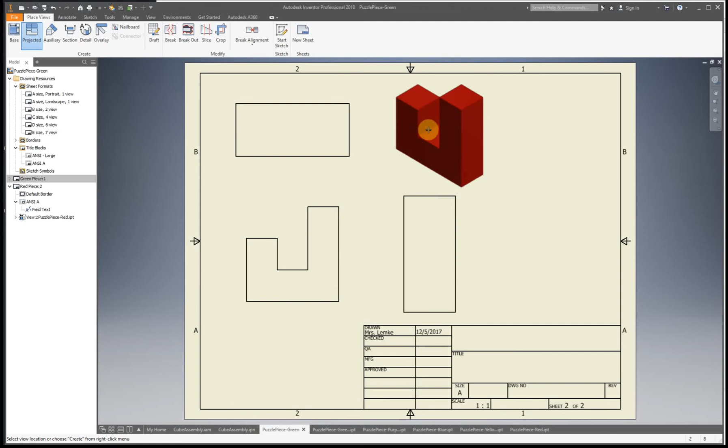So I'm going to open up our sheet 2, and you can see we have large. We don't want large. We want to delete that. And then we want to bring in ANSI A, so we have more room for our page. So this happens to be a great front view, which is nice. What I can do next is go to Place Views, Projected, and place in my other views. Then right click, Create. Remember, you're going to have those boxes until you do right click and create. Alright, so I'm going to double click on this, shade, OK, and here are my views.

So for this one, having this flipped to this side might look a little bit better, but I always refer to this piece as the J puzzle piece, so I'm going to leave it shaped as a J, because that is what I would consider the front view for this piece. So I'm going to go to Annotate, Dimension, and add in the dimensions for this part.

So you just saw that I clicked on that green dot. You can see how it's not actually doing anything. So if I move off to the side, you can see how it's dimensioning in the middle. We don't actually want that. So what I'm going to do is delete that and then put it back in. So I want the full line, not just that little tiny portion. And I'm going to click from this corner to this line.

I can place this. So I know in the green video I said you don't want the lines going over anything, but realize that they can go through as long as they're not overlapping with one of your lines. So they can cross it like this, but they can't go along it.

So if I was to do, let's just say one from here to here, and ooh, nice. So this one actually does pick up on this. The old version did not pick up on that. So that's good to know. So if you have used this before, if you made a mistake in the previous version, it's starting to correct it for you. So that will be very helpful for you guys when you're learning this.

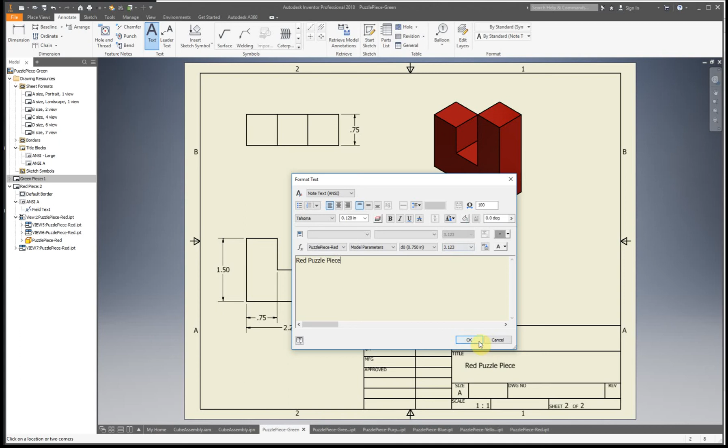So I have all my height dimensions, all my width dimensions, and my depth dimensions. That's all set up. All right, so we can add in the title. And then realize here you'd put your name and class. All right, so the next one is going to be our yellow piece. So grab yellow.

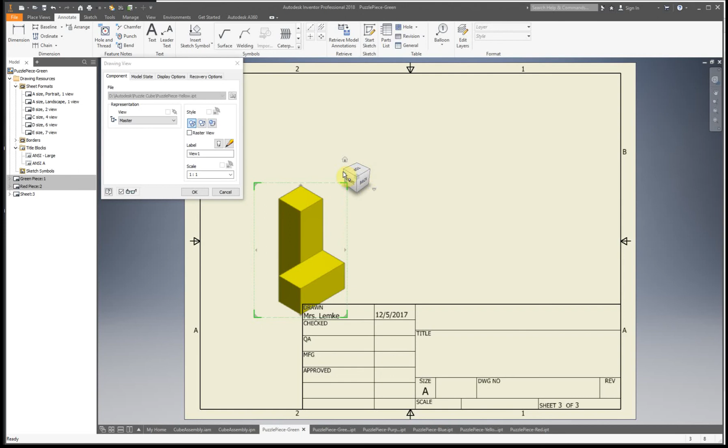So when you're doing this and you're adding the sheet and you select your new paper size and everything, it's going to bring in whatever was the front view according to the little cube in your actual part file. So for this one, I don't remember what's the best front view for this. I might have actually made this one with the good front view. So actually this one might be better. Yep, so I just happened to make this one with a good front view.

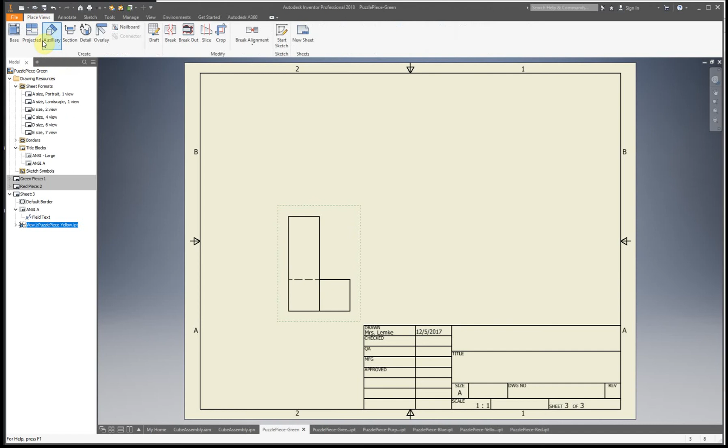All right, so I'm going to now change our title block size to make sure that I don't forget that. Sometimes you might forget it, so the easy quick check to make sure you have the right one without even having to look over where it's on this piece. This used to be called the browser, now it's just called model. If you had it closer to 2, then you know it's in the wrong spot. If it's in the middle of 2 and the arrow, then you know it's ANSI A. So quick check, that's how I quickly look at that to make sure you have it in the right spot. So again, place views, projected, place in our other ones, and create.

So you can see how these two kind of have pretty good views where they look very, very similar. And this one technically has less hidden lines, so therefore this one does kind of give you a better front view. This one does have a hidden line, but this is a really good isometric. So actually, I'm going to just turn this. Click OK. You can see how all of these automatically turn. So I'm going to now just do projected.

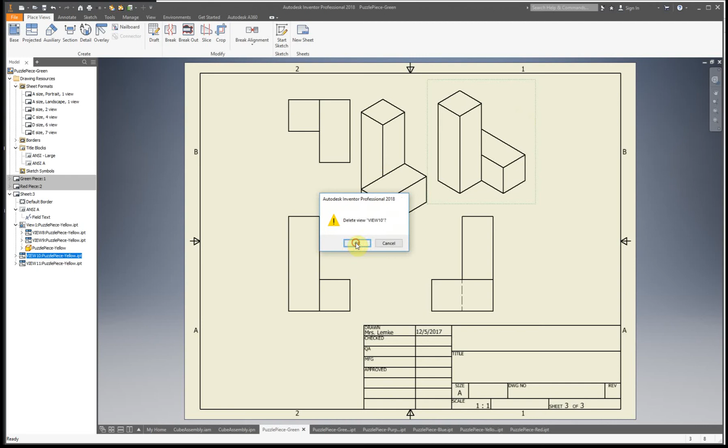So you can kind of see the two isometrics side by side. So this one's for how it's arranged right now. This is how it is by itself. So in reality, which one's better? Actually, let's go with this one, just because there are no hidden lines. So it's kind of following more of the rules that we want to do for this project. So I'm going to delete the view for how I had it previously, and this is our new isometric view for this. Okay, so what we're going to do is shade it, and it's all nice and shaded. So we're going to add in our dimensions.

So for this one, we have our total height and our height for our next little portion. And I'm going to do this small portion for the width and our total width. And then again, do the next one for depth and then this small portion for depth. So remember, we don't have to dimension this other part because we have the total and then the smaller portion of it. So remember, in yours, you would also fill out the title and name and class. So I'm going to go on to the next one. Oh, forgot to name the sheet. Okay, so if you're still in the dimension tool, if you hit escape on your keyboard, you back out of it.

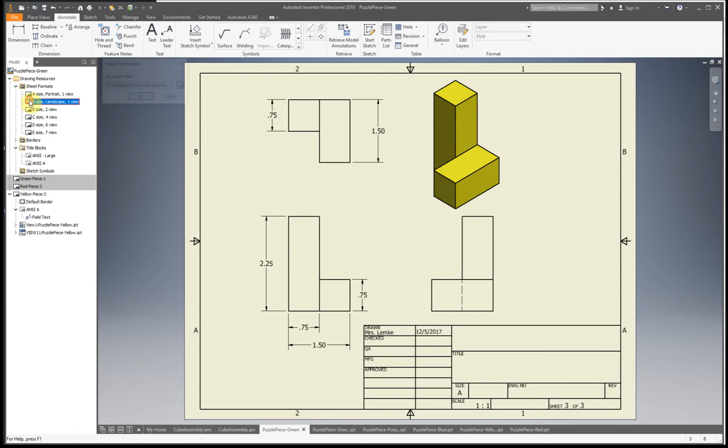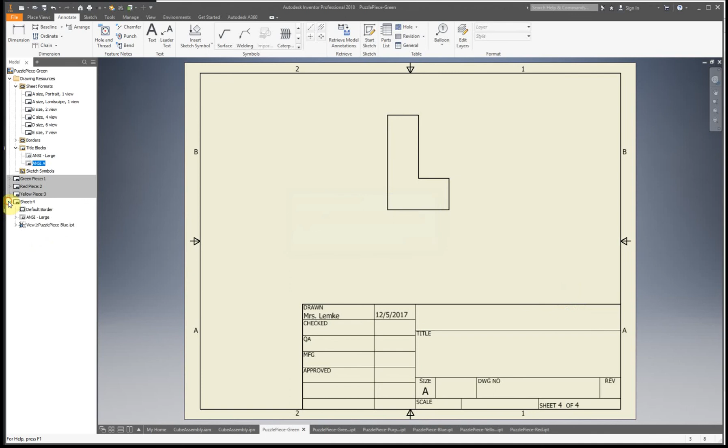Alright, so our next one would be, let's see, I guess blue would be our next one. Alright, and now we got to change our title block size. So for those of you asking, why don't we just click on it first when we do this? We can't insert a new one without deleting the old one. So that's why we just can't double click on it and swap it out. So in our sheet 4, we're going to now delete. We're now at ANSI A, and we can start.

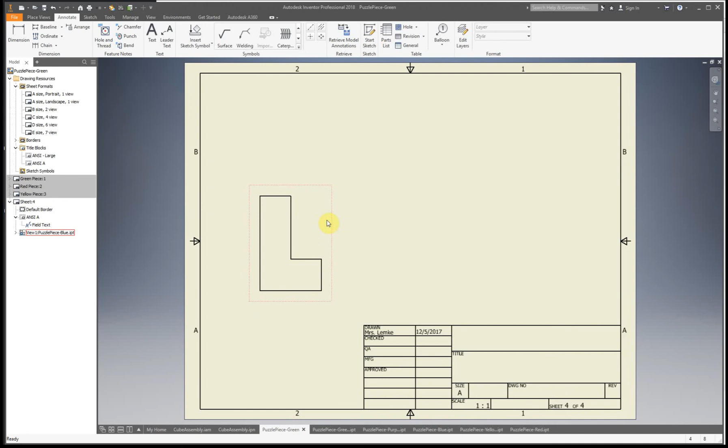Some of you might have noticed that our sheet number keeps increasing. So if we go back to here, you can see this is now sheet 2. If you're over here, we have sheet 4. So that's kind of the other reason why it's nice to put them all in the same one. You kind of keep track of which sheet's which. All right, so again, place views, projected.

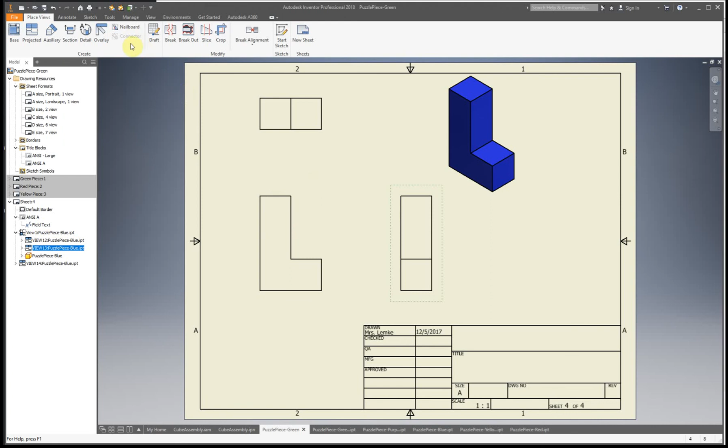As you can tell right away, this is the best front view. All right. So nice stable position, no hidden lines. You can see most of the details without a problem. All right. So now we're going to go to dimension.

Add in our dimensions. So you might be wondering why I always put them in the exact same spots. You're going to want to make sure that you have most of your height dimensions and most of your width dimensions on the same view, so your front view. That's where you're going to want most of these to be placed.

Okay, and then your depth dimensions can actually be placed over here. So your height dimensions can be placed over here, here, and here. Width can be placed here, across here, across here, across here. Depth here, here, here, and here. So there's plenty of places to put things, so when things overlap a little bit weird, you're gonna kind of have to move stuff around. So this is it for this one, except for title and name and class.

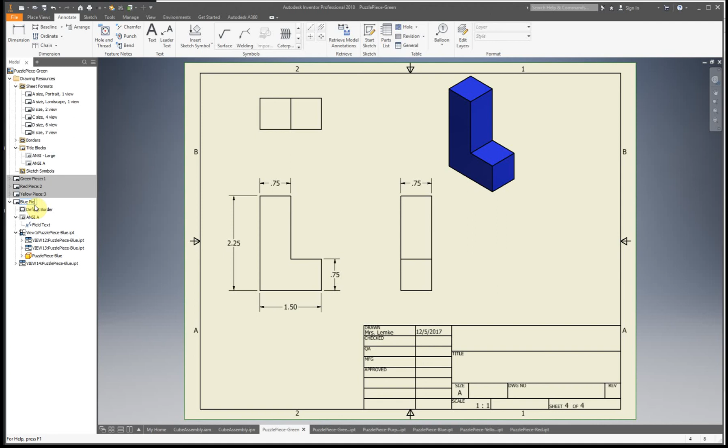All right, and then our next one, and I did the same thing again. So again, if you're stuck in a tool, I found if you hit escape about 3 times, it backs you out of just about anything you need to be backed out of. Alright, and now we're going to go for our last puzzle piece. So purple, and then OK.

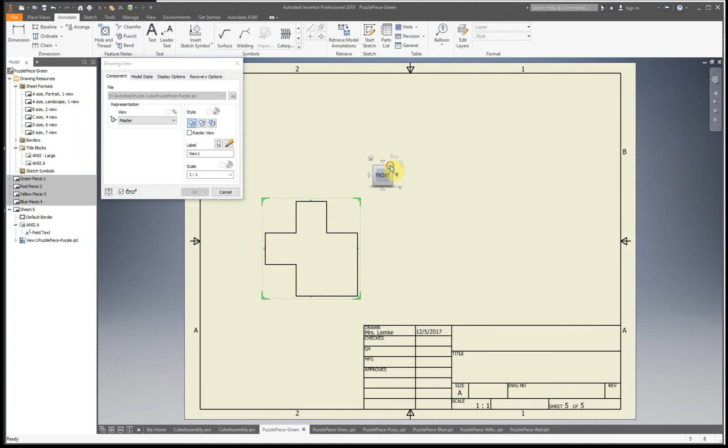Alright, so again we need to be in our sheet, delete ANSI large. Remember, don't delete the one from title blocks, because if you do that by mistake, it will cause some problems later on. So for this one, let's see, is this the best front view for this? So that gives us a good amount of information. Let's see if I tip it this way. It's really no better. Alright, so I guess this way works. So we're going to use this. So projected.

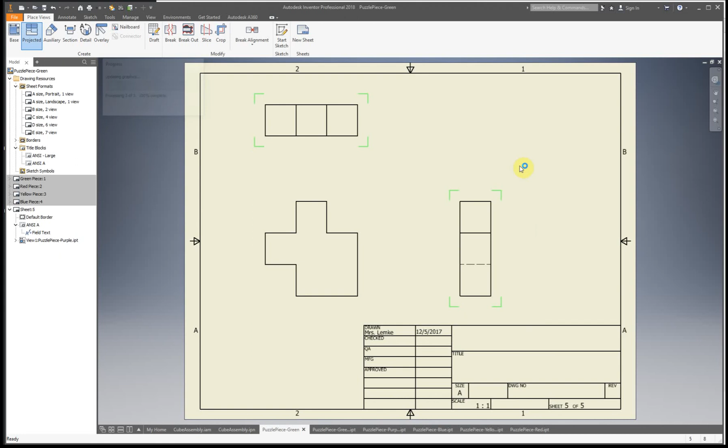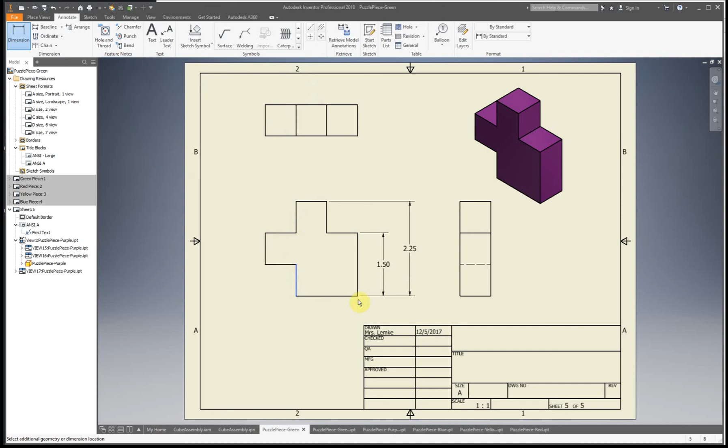Alright, we're going to make sure this is shaded. Oh. Double click. Shaded. Okay, and remember it doesn't shade until you click OK. Alright, and then annotate dimensions. So we're going to dimension here. We're going to dimension here. And we're going to dimension to here.

Alright, and then this time for all of my width dimensions, instead of placing them on this view, I'm going to place them on this view. The reason for that is these lines are going to quickly overlap and it's going to make a whole mess of everything. It's going to be really hard to understand what's going on. So I'm going to add in our smallest dimension first, because our smallest dimension needs to be closest to the part. Then our next largest dimension. And finally our overall dimension.

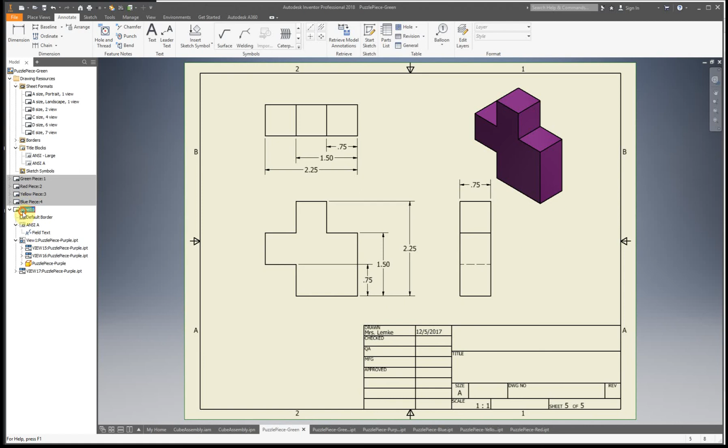Okay, so this little gap we can kind of figure out by this number minus this one gives us that. And for this gap, this number minus this one gives us that. And for this one, it's just that number. Alright, and then we need our depth. Just to kind of spread stuff out a little bit more, I'm going to add the depth right here. Alright, so remember for this, you're also going to want to fill out title and name and class. So I'm going to relabel this.

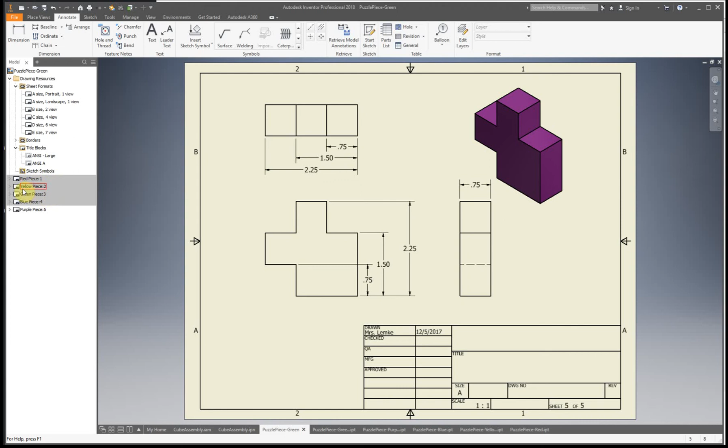Alright. So now I have all of my pieces. And if I want, I can actually move these. I'm going to have this in rainbow order just because it's an order for them that's logical. And you can see how green piece was :1 and now changed to green piece :3. So if I go to green, which originally was page 1, you can see that it's automatically updated to sheet 3. So it's an easy way to move things around after the fact if you don't like the order.

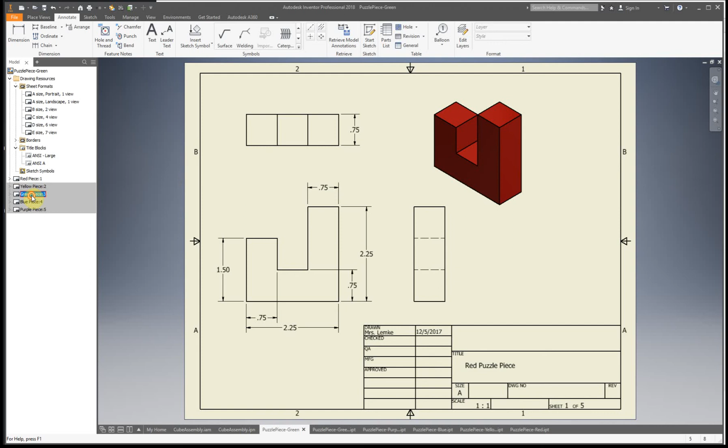Okay. So remember with these, when you hand them all in, you're going to want to make sure that you take these and turn them into PDFs before you submit it to me, because remember, Schoology doesn't read these files exactly how you want them to be. So just a quick reminder, make sure in here you have name and class, and the title of your part, something as simple as green puzzle piece. Simple as that. But please don't forget your title and name and class.